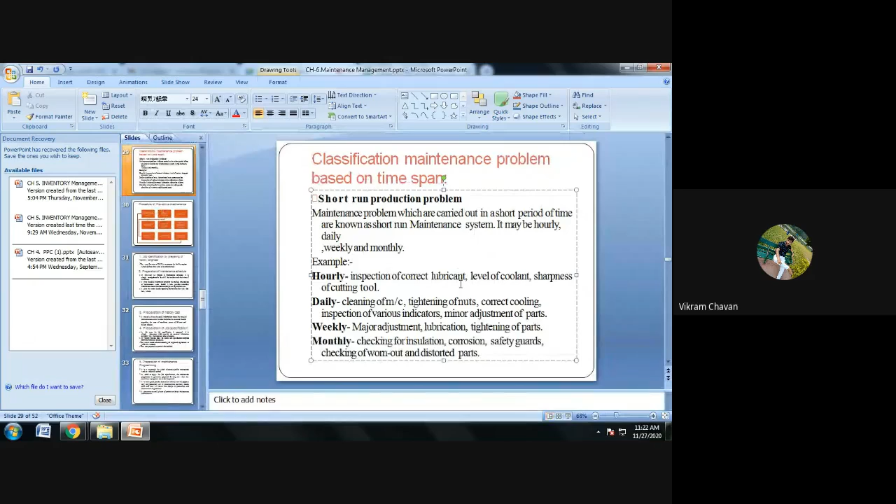Instead of production, put maintenance system - short run maintenance system. It may be hourly, daily, weekly and monthly basis.

Example: first, hourly. In that, inspection of correct lubricant, level of coolant, sharpness of cutting tool, etc.

Then second, daily. In that: cleaning of machine, tightening of nuts, correct cooling, inspection of various indicators, minor adjustment of parts, etc.

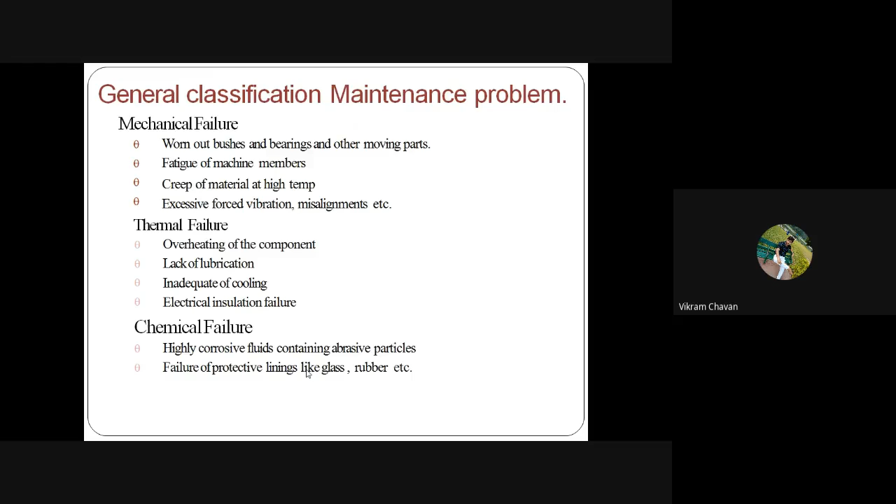So that will be short run maintenance problem. Second, long run maintenance problem. Here I have not mentioned it yet, but put the heading: long run maintenance problem.

Write down: long run maintenance problem. Maintenance problems which are carried out in a long period of time interval.

These are known as long run maintenance system. Example,

Scheduled maintenance, breakdown maintenance, and unplanned maintenance or emergency maintenance.

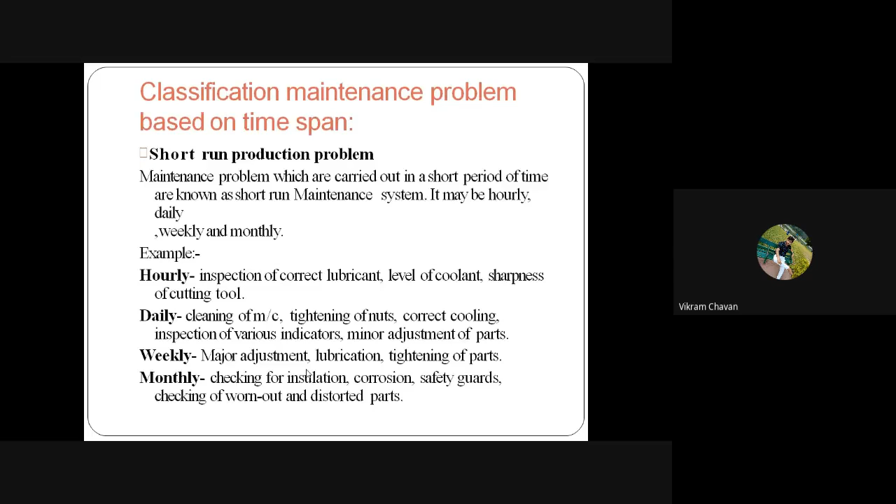Is there any question, any doubt in classification of maintenance problems? Shall we move ahead to the next point?

Okay, so the next point is procedure of preventive maintenance. Write down the heading: procedure of preventive maintenance, or we can write preventive maintenance procedure also.

Because its short form is noted, or in industry the short form used for this particular preventive maintenance procedure is PPM or PMP, preventive maintenance procedure.

Okay, so in industries, to carry out the maintenance activity smoothly and to reduce the efforts and complication in the activities, the industries are following some procedure.

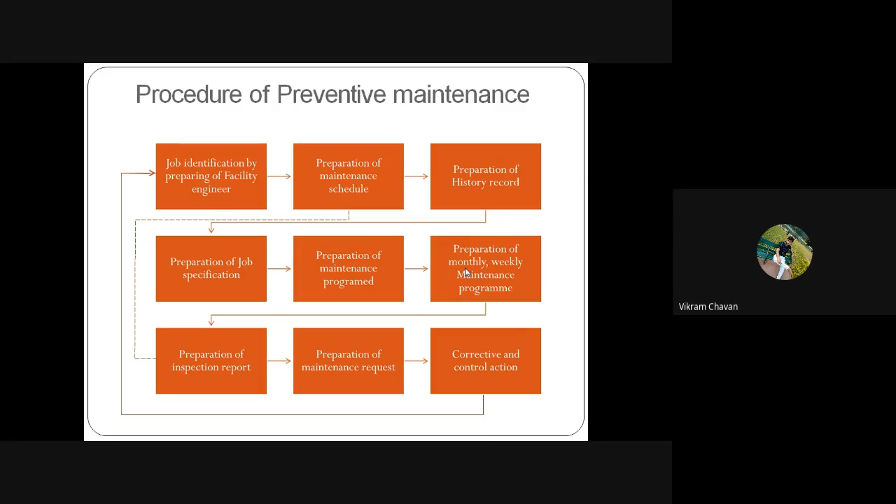Okay, shall we move ahead to the next point? So the first one is job identification by preparing of facility engineer.

So what is meant by job identification? First of all, the engineer needs to prepare one register. All the maintenance activities should be mentioned in that particular register. So the very first step of PMP, that is preventive maintenance procedure, is to prepare the facility register which defines what to be maintained.

The maintenance engineer should prepare a register, and in that he has to mention which machines or which procedure have to be maintained, and what parameters should be maintained for that particular machine. That should be decided in the first step. That will be the job identification.

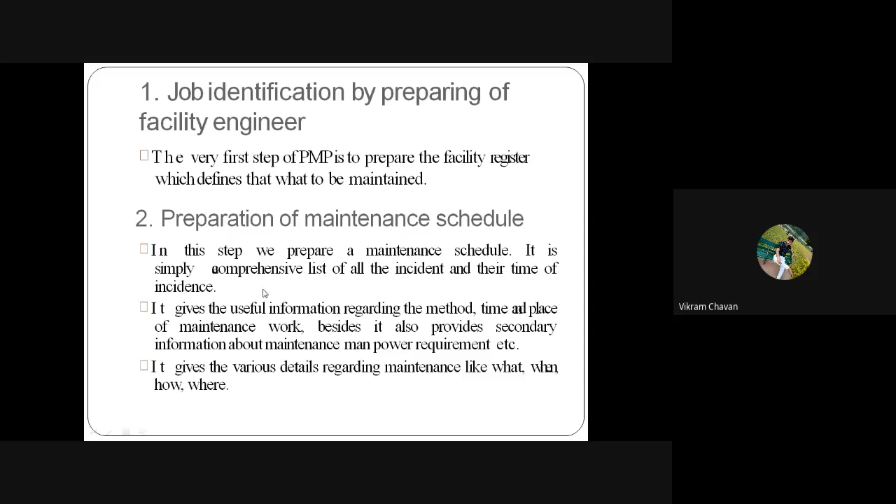So the next step is preparation of history card, which will provide the result of a maintenance. History card of a particular machine is prepared, for the specific machine, and it will provide the cause of failure and failure modes.

So what data is required to fill in the history card? Cause of failure and failure modes. And whatever maintenance activities are carried out, that result will be recorded. By watching the history card, we will come to know the cause of failure, the failure modes, and whatever maintenance was performed for the specific machine.

And what are the results? Result in performance of that particular machine - so the result will come to know from the history card. So the preparation of history card is the third step.

Then the preparation of a job specification. In this step, the job specification is prepared. It is simply a document which provides the essential information regarding the maintenance work to be done. In general practice, the job specification is compiled from the maintenance schedule. They are a means of communicating the engineer's requirement to guide the workers, and they are prepared separately for each job.